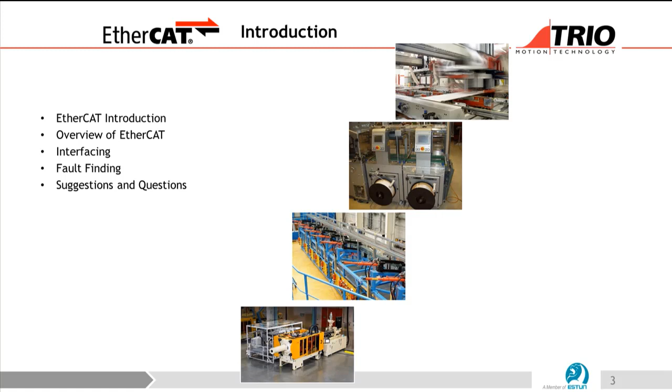Alright, so we're looking at EtherCAT. So it's just a basic EtherCAT introduction. So we look at the overview of EtherCAT, the interfacing and fault finding, some suggestions and questions.

So EtherCAT basically is an Ethernet fieldbus. So an overview on what it is. So this is sort of a traditional analog system. You have the field inputs and outputs, like IOs using CANopen, going to the controller, and you have the servo. From the controller you're feeding the analog voltage to the servo drive. If you look, there's nothing wrong with the system, but there's a lot of cabling and many things that can go wrong, electromagnetic interference and stuff like that, right?

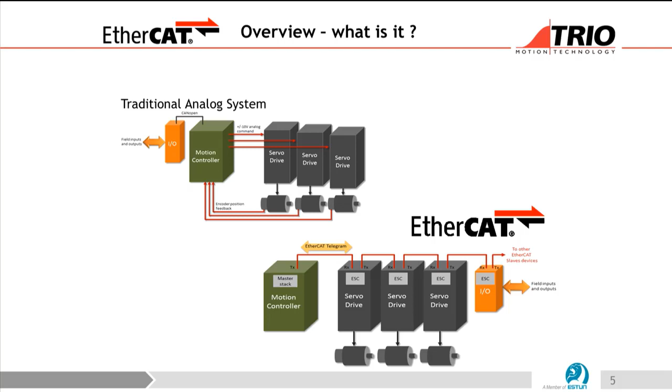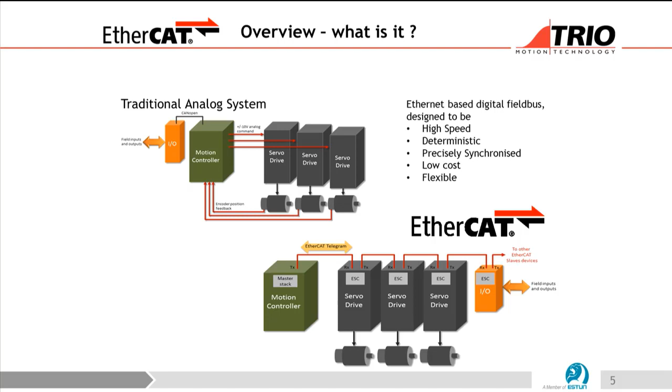So in the EtherCAT system, everything is sent through the EtherCAT telegram. You have only one motion controller, and all the servo drives and IOs connected via this are called slaves. They are just connected via the EtherCAT network. So it's easier, it's not messy, and it's easy to debug. It's high speed, deterministic, precisely synchronized, low cost, and flexible.

Alright, so this slide shows the key benefits, which were already discussed before. Basically it's the ease of use. If you have familiarized yourself with this controller and you are using EtherCAT, it's simpler because it's just one cable. If you are wiring up the servo yourself, you are wasting a lot of time. Yes, faster machine build and commissioning time. So that's what I say.

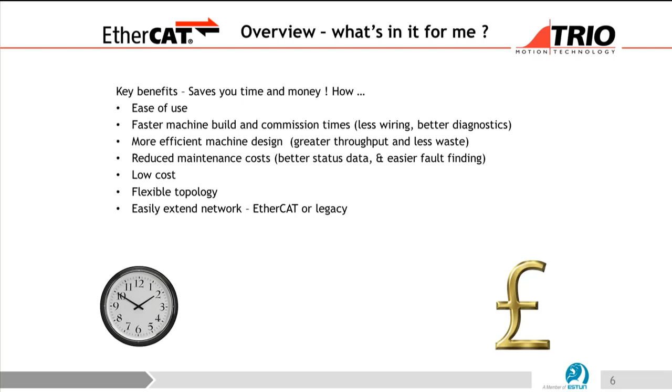Less wiring, better diagnostics, so you reduce all that. More efficient machine design, greater throughput and less waste. Like what I showed you, it makes the architecture smaller. Reducing maintenance costs, better status data, low cost, flexible topology. You can have ring, all sorts of topologies. You can easily extend your network from a legacy controller to EtherCAT. And wide vendor support and diverse slave types.

Alright, so the thing about EtherCAT is you can have the slave devices. The EtherCAT technology originated from Beckhoff in Germany. You can create an EtherCAT slave, but if you are a master, you have to pay some fees to Beckhoff. So there are so many slave devices in the market: EtherCAT stepper drives, servo drives, IO devices, thermocouplers, encoders as well. So no license on slaves, but license for masters.

Which I would say is very convenient, because you're only going to have one master, but the slaves are the many. That's why it's getting more and more popular. But maybe Jeff can explain. When Trio decided to adopt EtherCAT, they were exploring which factory automation communication protocol to adopt, and everyone decided to go with EtherCAT because of all these benefits they foresaw.

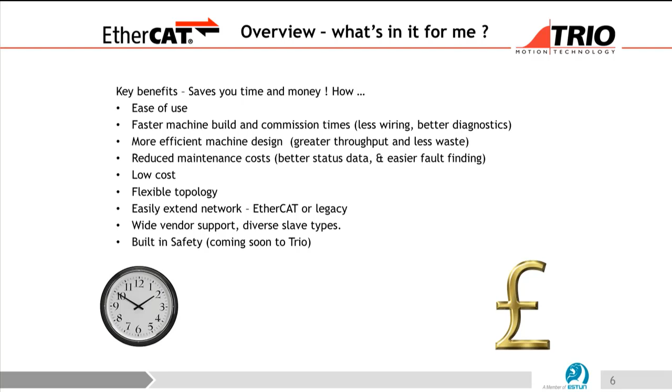So, you're talking about CANopen, right? Even with CANopen everything is fine, but in terms of wiring and stuff like that, I think this is more flexible, and going forward everything is going to be faster. At one point people start thinking that you will be tied to them forever. If one day they say, okay, we are going to stop developing it, what is the factory going to do?

Another reason is that some projects need special devices, like encoders or safety devices, and they are all developed over EtherCAT. So if they don't have EtherCAT, they're going to be out of the project. Exactly. That is why EtherCAT is getting more and more popular, because many manufacturers go that way.

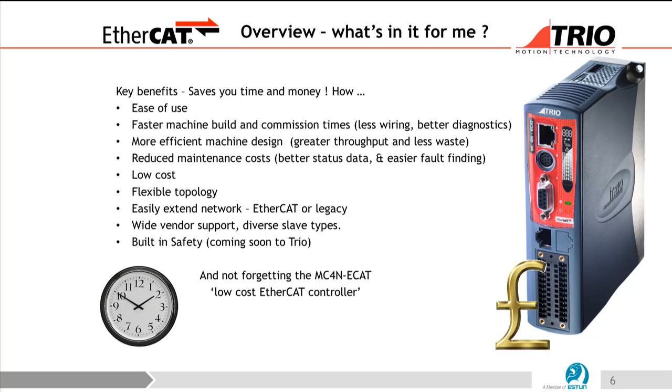Yeah, this slide needs to be updated. The 4N will be obsolete next year. It's replaced with the 6N, which is more powerful. The 4N was sort of the first generation EtherCAT controller that Trio came up with.

So how does EtherCAT achieve high speed and deterministic timing over Ethernet? It uses the physical layer, and it's not using CSMA/CD, which means collision detection. So it's just sending a telegram and then receiving it back. In Ethernet there is collision detection, so it has to be broadcast and then it has to make sure that the telegram comes back to the right sender. Yes.

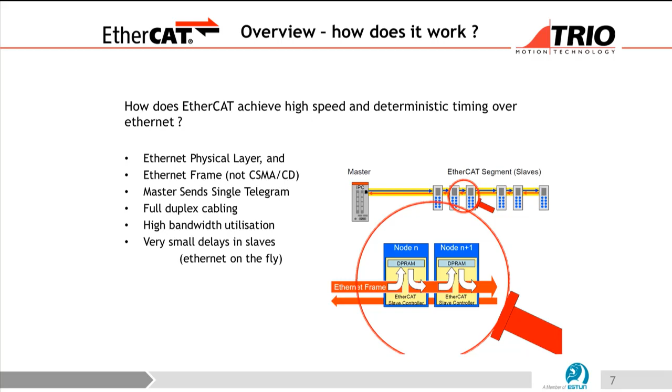Yeah, so sort of this. The master sends a single telegram. You have full duplex cabling, so high bandwidth utilization, very small delays in the slaves. We call it Ethernet on the fly, or if you want another analogy, EtherCAT is like a fast moving train where the passengers just get off wherever they need to. If you think of that, then you can understand the whole EtherCAT.

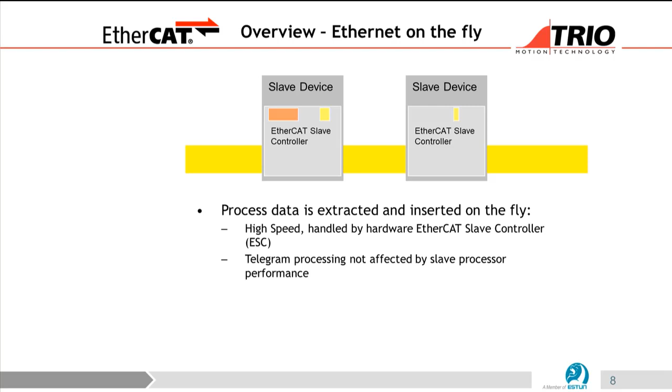Alright, so this is an analogy of that. You can see that the process data is just extracted and inserted on the fly. It's high speed, handled by the hardware EtherCAT slave controller, called the ESC. There's a slave chip in all of these and it's controlled by this chip. So the telegram processing is not affected by the slave processor performance. Your data transfer doesn't matter if your slave processor is slower, it's still using EtherCAT. So it will still work as standard Ethernet works, right?

Process data of any size per slave, almost unlimited. Also the format of process data can be defined by the application layer protocol. An additional one is asynchronous event-triggered communication, the mailbox, which is included in the telegram. So you have two types of data transfer. One is synchronous, which is cyclic, done at the EtherCAT servo period, and another is asynchronous, meaning you can request some information from the slave and it can provide it. That can be included in the mailbox when it's transferring the data.

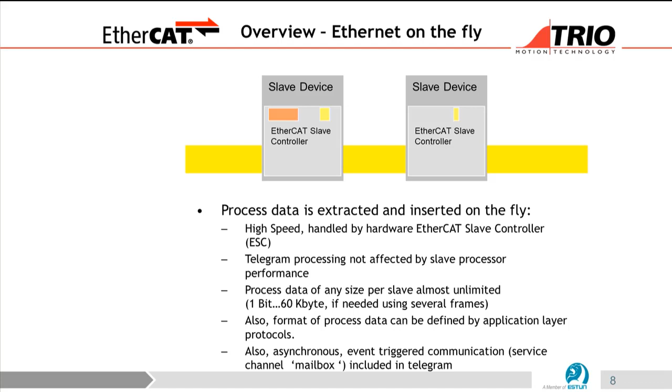So this is the precise synchronization, which is lower than 1 microsecond by the adjustment of distributed clocks. When you are activating an EtherCAT network, there are 4 states of EtherCAT. The initialization state will tell me that I'm on this clock. Then it will send to all the slaves through this switch, so it will know the position of each slave by the position of the cables.

So when the data is sent over, the delay is always a fixed delay. The slave knows that I'm in position 1, I'm in position 2, so this is the time I should receive the telegram, this is the time I should send back the telegram. So that is the precise synchronization. The term we use is distributed clocks. Okay.

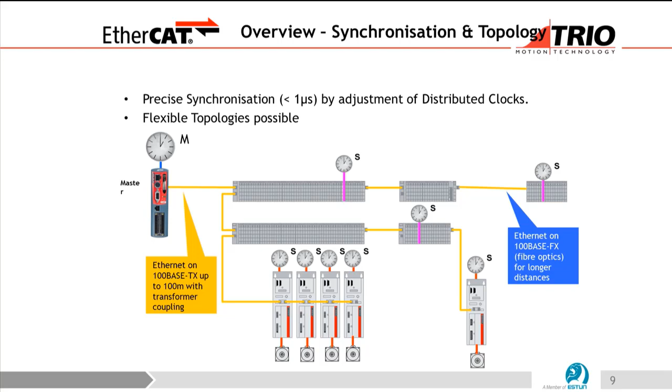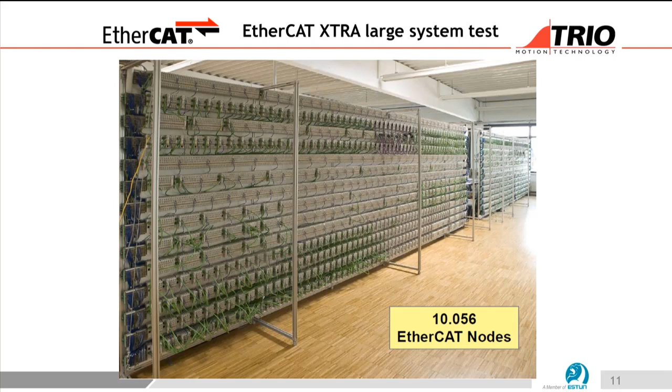So this is an example of Beckhoff, where they have 10,000 nodes on an EtherCAT system, and the thing is, the data is sending faster than the analog way.

Alright, so this slide is actually explaining how EtherCAT works the Trio way. So we use it to exchange data, and the protocol that we use is CAN over EtherCAT. All these objects which you see are CANopen objects, each representing a function in the CANopen library. So 6040 means control word, and you have the target velocity and the modes of operation, stuff like that.

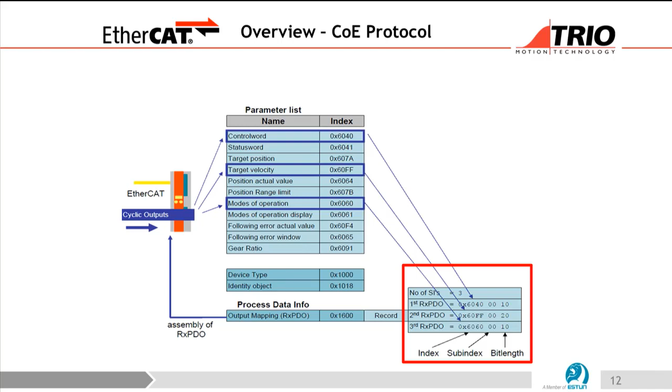And if you look at this, the process data info, this is what we're going to map to the slaves. It's called PDO, and these are the data that will be sent cyclically. You can see that there is this index and sub-index, and you have to define all the bit lengths that are sent through, so it knows what data is sent through, what it's expecting and what to read back.

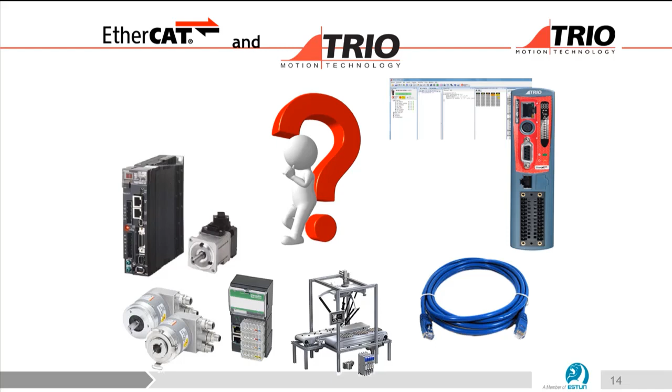And then that was the RX PDO, and this is a transmit PDO, so what you are sending back to the controller. This is just a slide showing how you can integrate all this. So you have encoders, you have servo drives, you have IOs.

So a typical EtherCAT master will use the following procedure to create a network configuration. There is a file called the ESI file. It's the EtherCAT slave information. Every slave manufacturer will have this file.

One more interesting thing about Trio is it doesn't matter what EtherCAT slave you are using, we're able to communicate with it, because we take this ESI file, extract it, and then put in the information that Trio requires. We call it an EC extend file. So we create it for this.

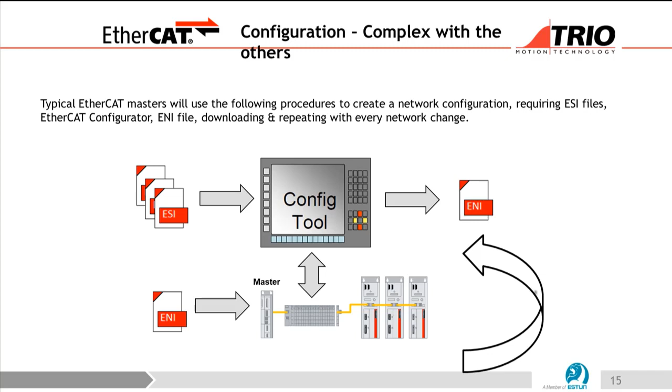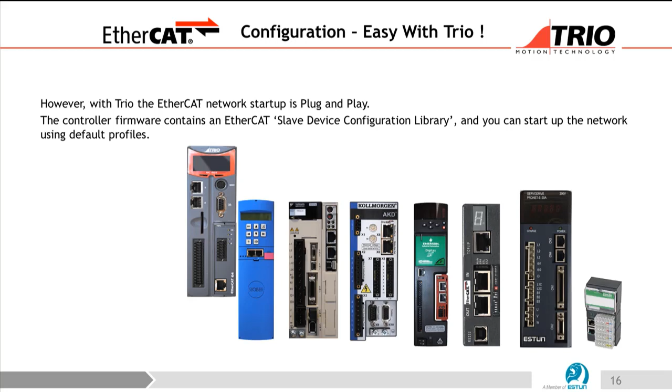In our database there are hundreds of EtherCAT slaves, but there are still hundreds of EtherCAT slaves being produced, right? So it's not updated. If you have some new devices, we can just create an extension file and add it into your network. That's why I say startup is plug and play. So you have all these servo drives lined up, so you can start up the network as fast as possible.

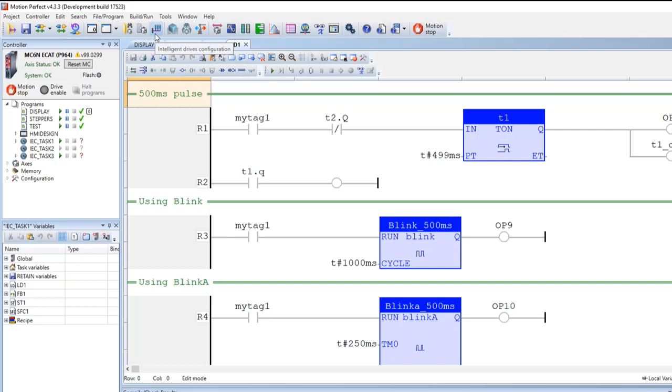So now I have a controller connected to the EtherCAT network. You still use the same Motion Perfect, right? But you use this intelligent drives configuration. If you click on that, obviously you don't have anything connected right now. You will see here, and I like this because it really gives a graphical interface sort of feel.

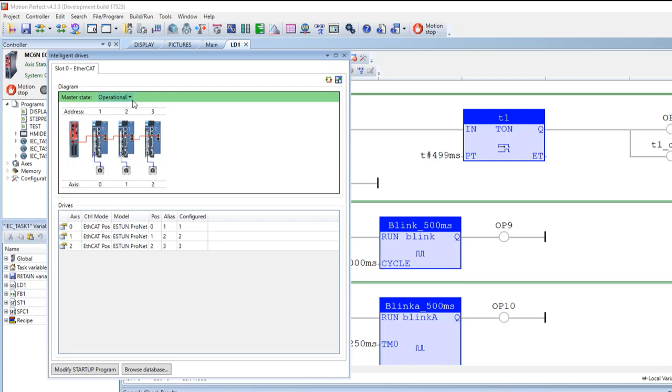It says now I have my controller connected to 3 axes of drive, which are Estun ProNet drives. It shows the pictures, and this is axis 0, 1 and 2. What are the addresses? Everything is given here. Okay, so I can change. Just now I showed you the 4 stages of EtherCAT: initialization state, pre-op, safe-op, and operational.

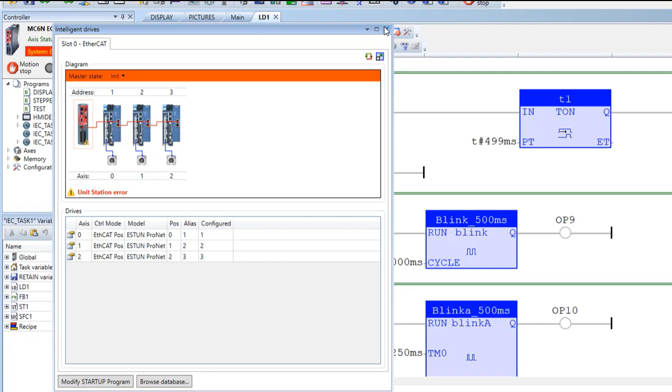So if you just have a controller and wire it up to a drive, the first thing you do is go to terminal 0 and type in this command, EtherCAT 0 0. What it does is reset the EtherCAT network and find the new slaves, alright? And this will actually set all the states here,

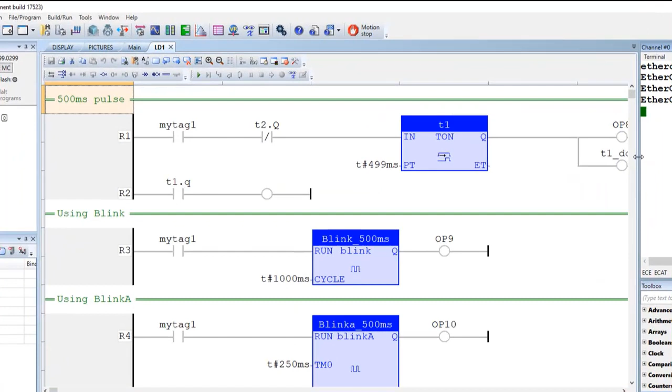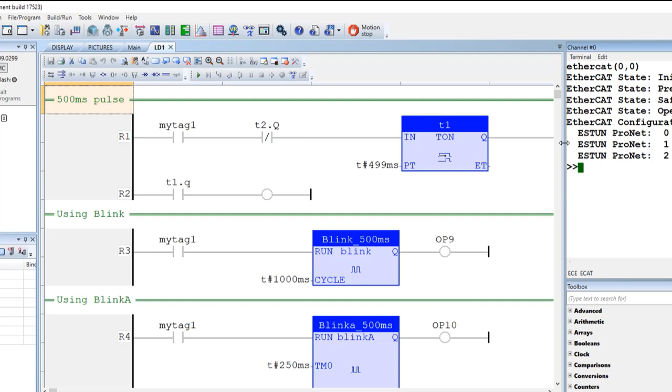and will also give information on whether it's in operational state or pre-op state, and if it's in pre-op, why it's in pre-op, it will tell you. So now over here it says it's in operational, and the configuration will tell me which drives are connected, in which axis, which switch position. So I know exactly which axis is which drive.

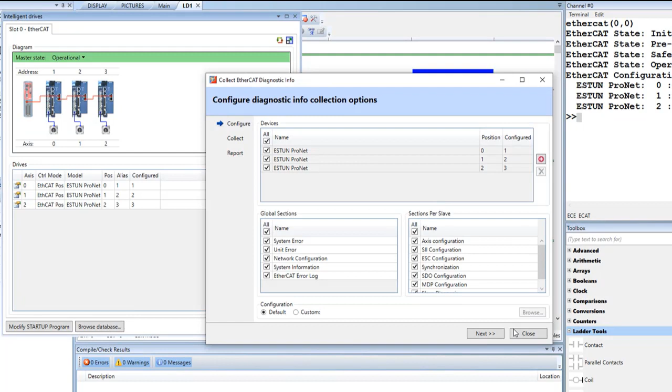Similarly, you can do that from here, and if you click on the controller port, this will collect any diagnostic info and then let us know what is wrong with the device. Okay, so if I do this, it will generate a report to us.

In this format, now you can see it says there's no current system error, there's nothing, it just says my servo period, and it will tell you what is the axis, what is the vendor ID that is connected, and so basically this is setting all the addresses up and telling you

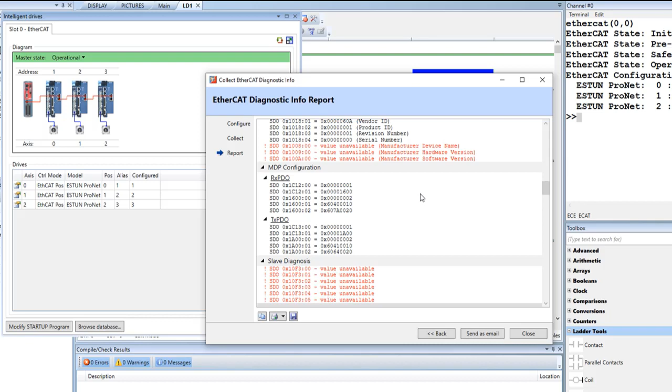what information is being exchanged. So if, after you put in all the information, you have an error, you just click on this, generate the report and send it to us, so we can debug what the problem is, and then we can explain to you why it's having this problem.

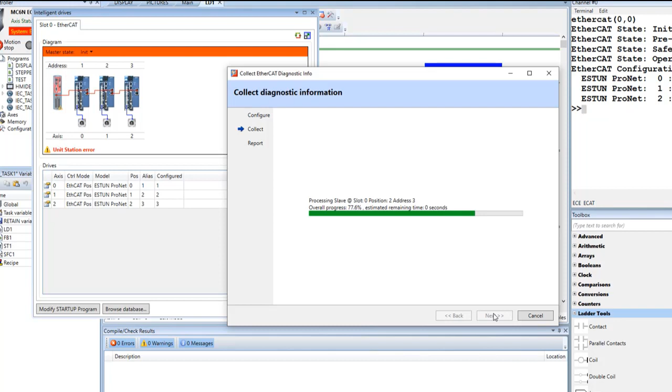So let's say I put this in init. Alright, now I click this, generate report. So now it's saying my remote device has reported an error, so my drive is not responding. Why is that? If you check on that, all these error flags have been set up. Oh no, the error flag was there, it's an error log.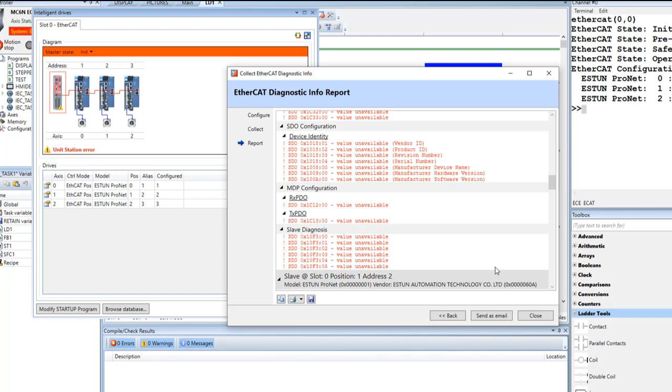So from init to pre-op, it will start exchanging some information saying, I am this device, are you ready, and stuff like that. So if you click on this, now it's saying there's no system error, but I am in pre-op, so I still haven't received any data. So let's look back.

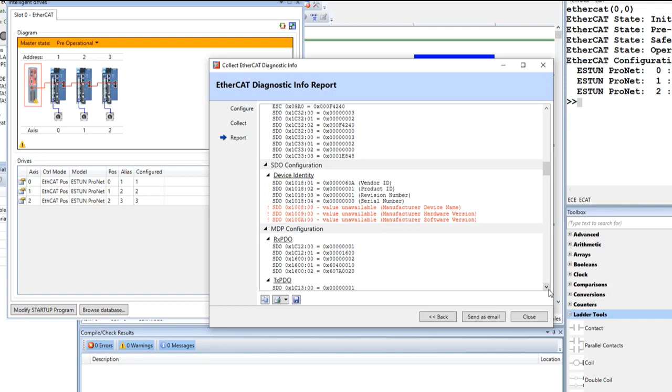So now you can see the difference. Now you have all this mapped inside, right, but it's still not ready to talk until I reach the operational state where you can enable the drive.

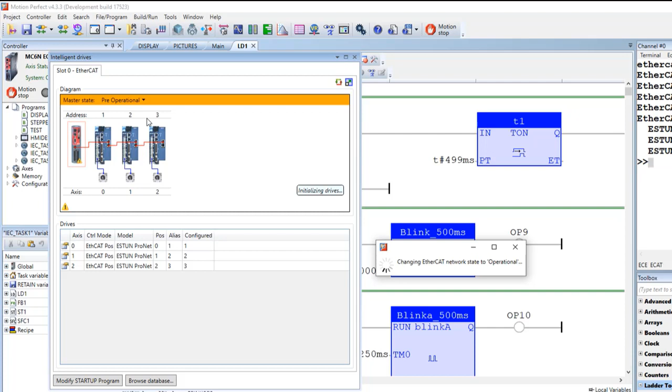So you can set from here itself, but if the states are not really... oops, shouldn't have done that.

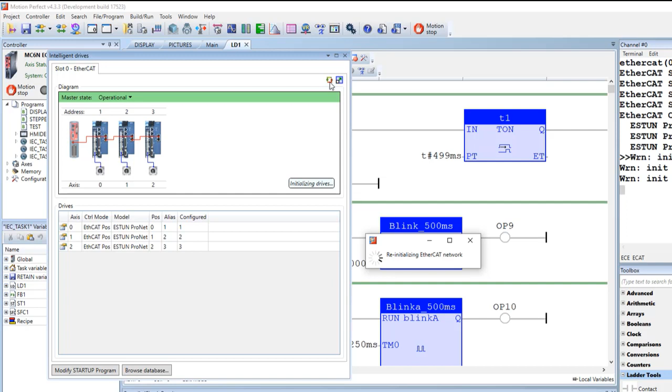You can do it from here itself. This is exactly the same, yeah. EtherCAT 00. So that button is actually the EtherCAT 00. So it does. It's doing it again.

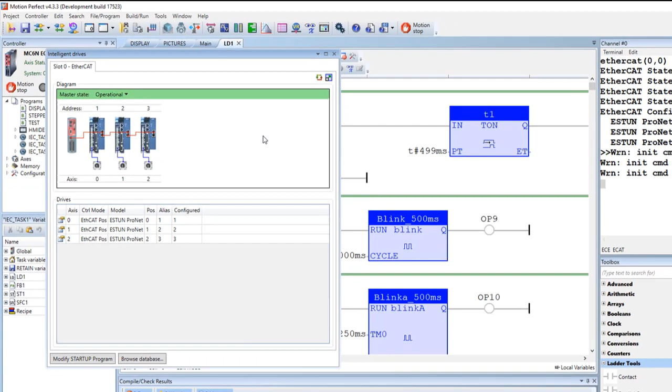So that's why they say it's plug and play. Obviously it's plug and play because now I have the EtherCAT slave information of these drives in the controller. But if you have a drive where I don't have the information, then you have to send it as a file for us to take it as an ECX file.

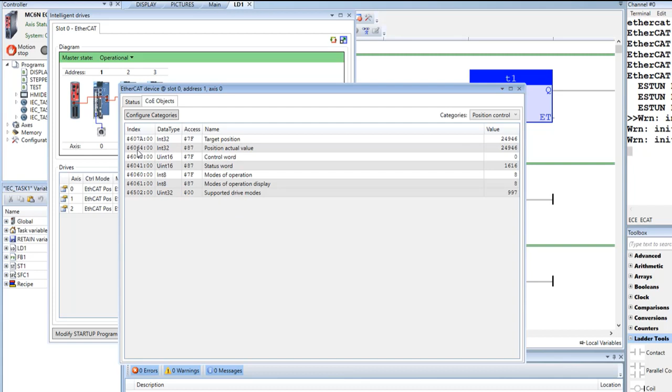So if you click on the drive, it will give you the status: the position, the alias, address, your controller, your position, your control word, your status word, and here it will give you the CANopen object, the equivalent. So 607A is the target position, and 6064 is the actual position. And you can click on this, it shows the same thing.

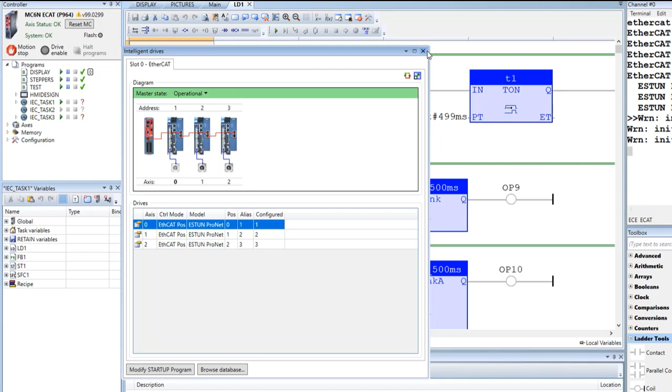Only the information that needs to be mapped to EtherCAT will be different. Like here, obviously it's a servo drive, you need position. For IO devices, you need something else, other things that are different. Yes, so I think that's all on the EtherCAT side. Any questions?